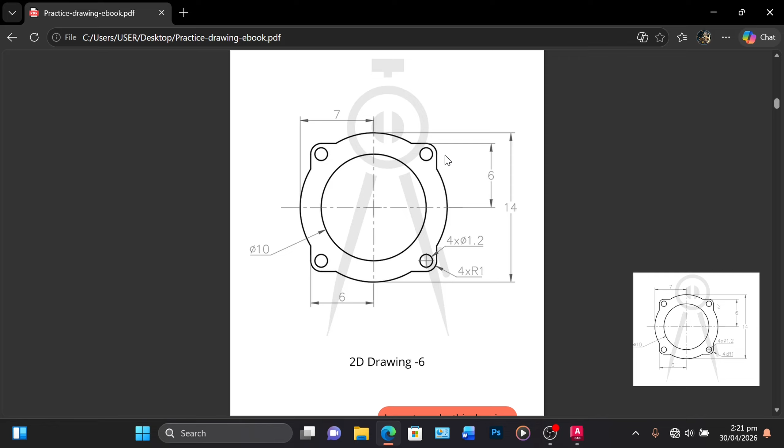Straight away we get our circles using the center, diameter of 10, then simply press enter to repeat the command. Second circle has a diameter of 14. Enter. Alright.

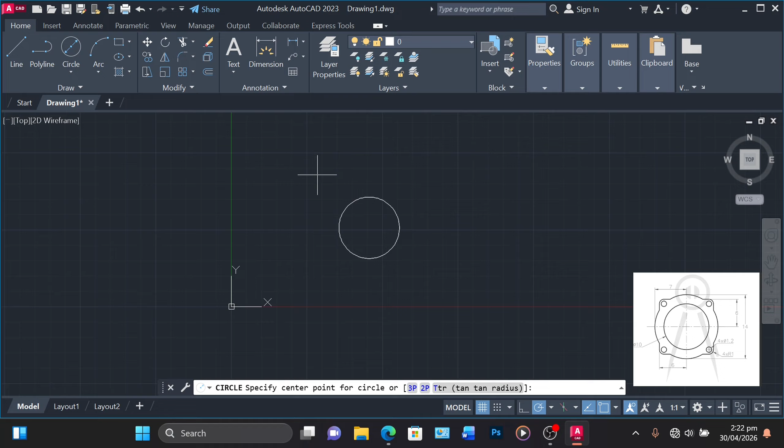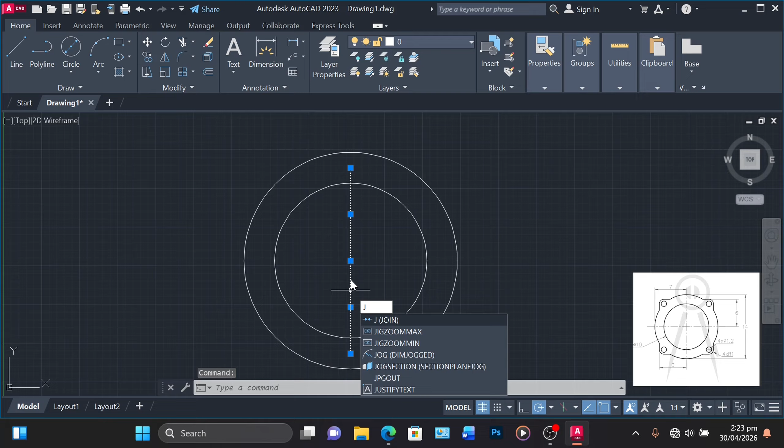We have a line that is 6 units from the center to top and 6 units from center to bottom, 12 units in total. We join it using J. Simply select the line and press J, then we offset the line.

6 units to each side, there, 6 units here. Then we can do away with this, no longer needed. Alright, then we join these.

And we can now work on the circles at each edge. So simply to get our 45-degree angle here, and then we can get our circles with diameter of 1.2, and then right click, selected, then right click, copy selection.

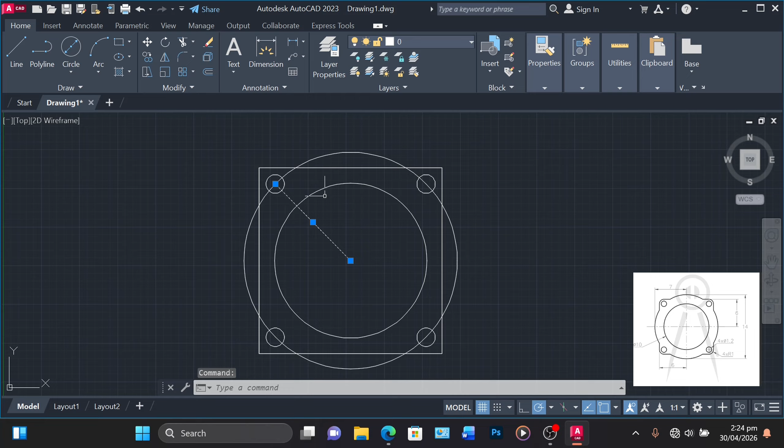You can just copy and paste it without needing to draw the same circle multiple times. Select the line and press delete to erase it.

Then for the curved edges here, we use fillet. So select radius and then put the radius 1. Select the edge, press enter. Then press enter again to simply repeat the same command with the same radius value, and then you're good to go.

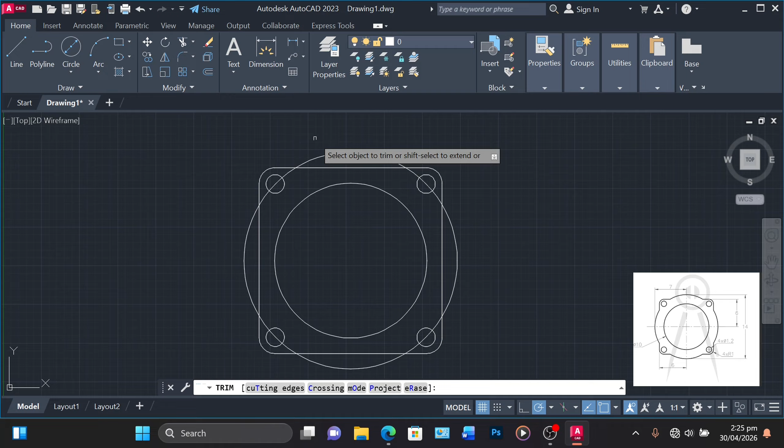So there was a repeated line here, that's what we are seeing. Erase it. Now we use trim to clean parts of a line.

If the line cuts through another line of an image, you can clear part of it, but we can't clear independent lines that are not crossing. So this is a circle, nothing is crossing in it, we can't trim it. Same with this. Simply the function is just in the name, trim. You have what you want and you are removing excesses, so that's it.

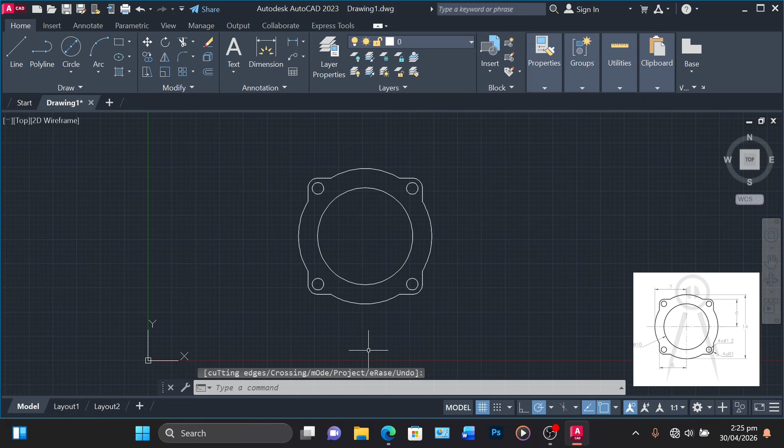Once you're done trimming, you press enter, and that's your full image for image 6 of SourceCAD practice drawing. Thank you, see you next time.